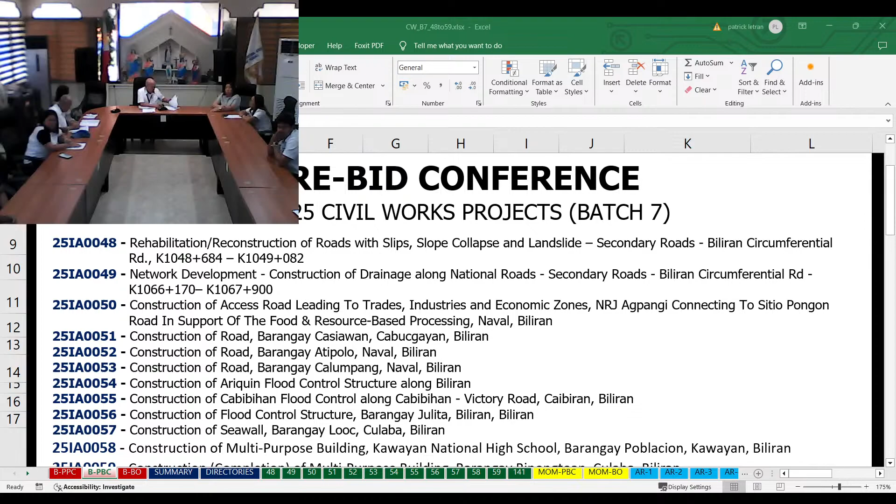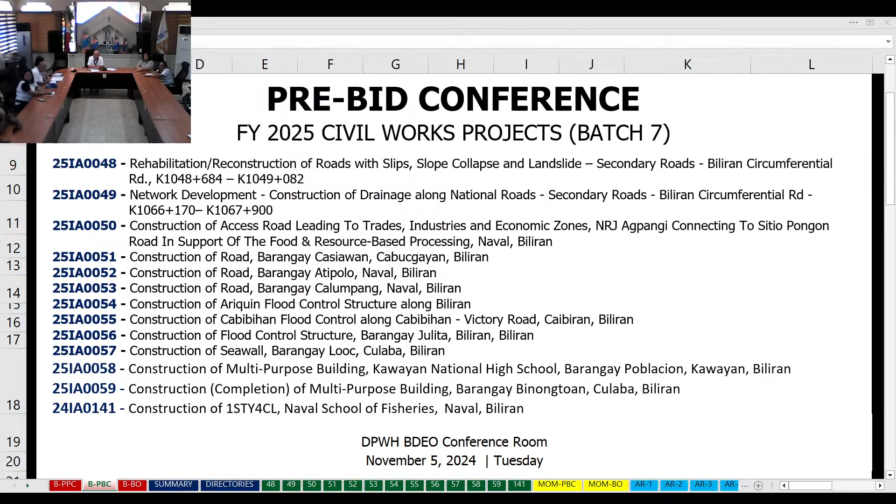This morning, we will be having the pre-bid conference for 13 projects for CY 2025. As Vice Chairperson of the Bids and Awards Committee of this office, I will preside over this pre-bid conference in behalf of our chairperson, who is now at the regional office for an emergency meeting called by the Assistant Regional Director.

The pre-bid conference, as per Section 22 of the IRR of RA 9184, shall be done for projects costing 1 million and up. For projects less than 1 million, the pre-bid conference may be conducted at the discretion of the Bids and Awards Committee. Since our projects cost more than 1 million, this pre-bid conference is mandatory.

The pre-bid conference shall discuss, clarify and explain, among other things, the eligibility requirements and the technical and financial components of the contract to be bid, including questions and clarifications to be raised by prospective bidders. But unfortunately, we don't have prospective bidders despite being notified properly.

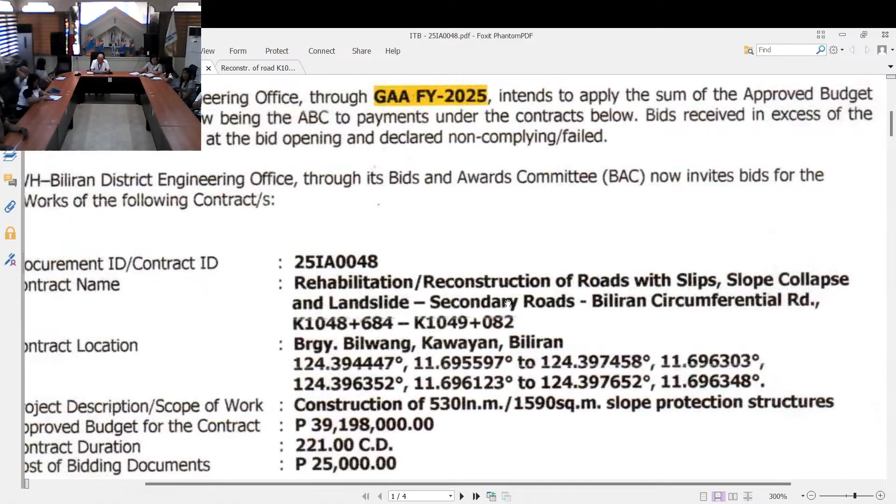Biliran Circumferential Road, kilometer 1048 plus 684 to kilometer 1049 plus 082, located in Barangay Bilwang, Kawayan, Biliran. So who will discuss this? Engineer Mintruda.

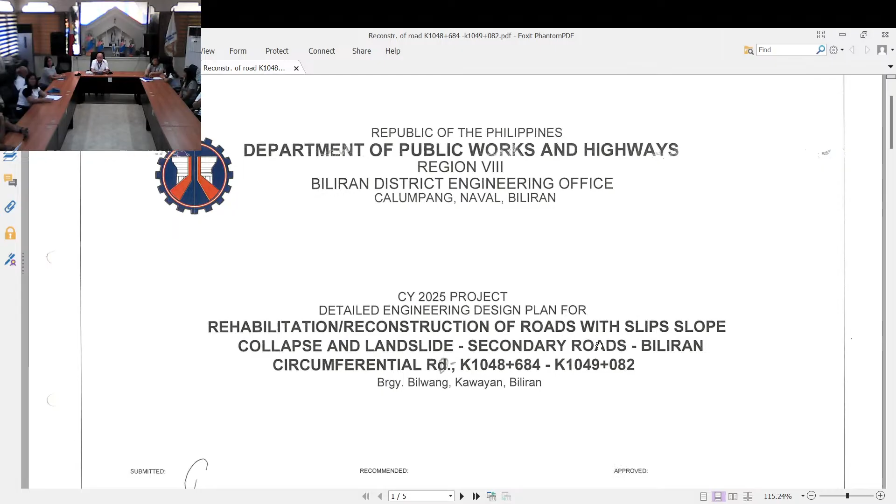Good morning, everyone. This project is construction of a retaining wall located at Barangay Bilwang, Kawayan, Biliran. The scope of work is construction of 530 linear meters or 1,590 square meters of slope protection structures. The project amount is 40 million, but the approved budget for the contract is 39,198,000 pesos. The total contract duration is 221 calendar days.

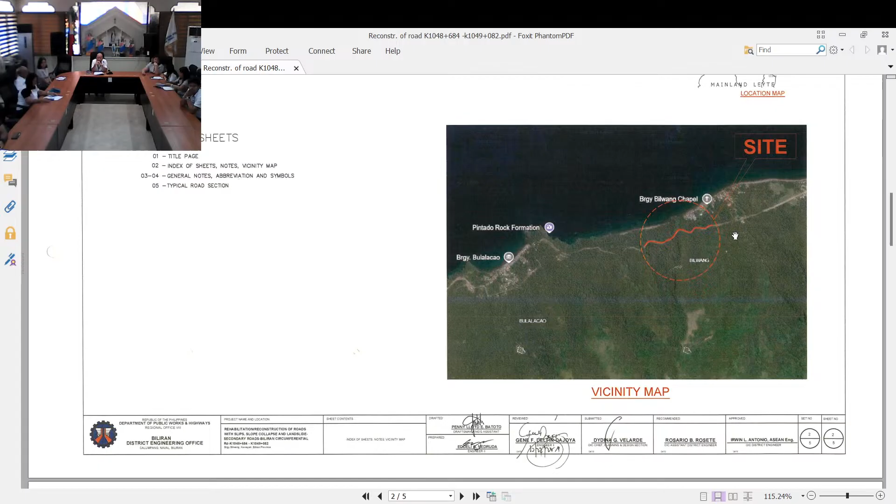This project has two locations: one at the cliff side and the other at the mountain side. At the cliff side, the design will be a reinforced concrete cantilever wall with the foundation supported by a steel sheet pile 6 meters in length. This cantilever wall has a height of 5 meters, as seen on the screen.

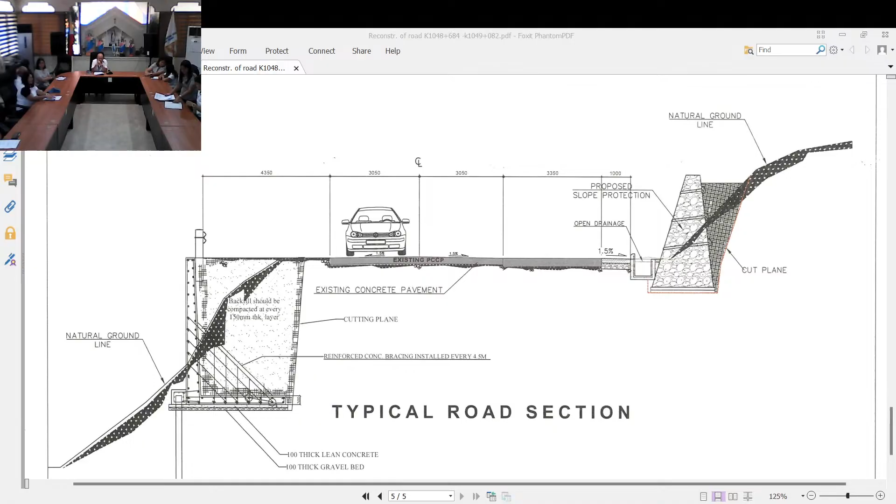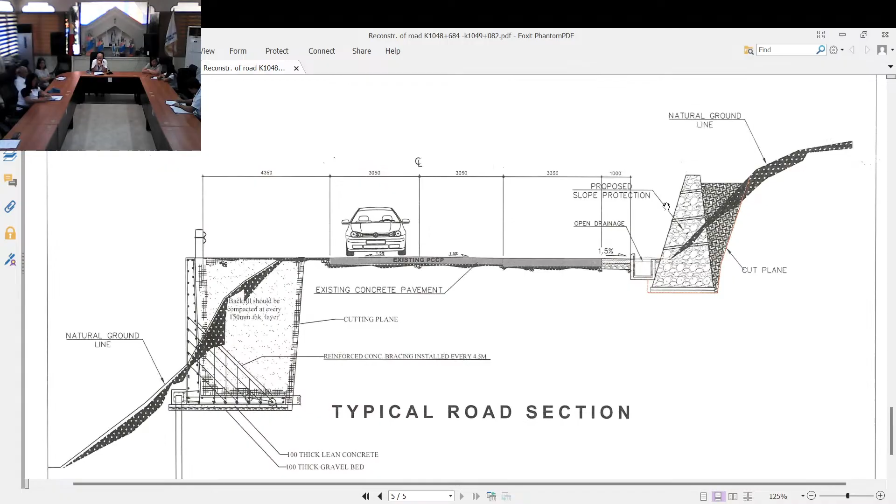Then on the right side, the design will be a rubble concrete retaining wall with a total height of 4 meters. It also includes construction of concrete drainage. So that is all for that project. Okay, thank you, Engineer Jack.

Next project is network development, construction of drainage along national roads, secondary roads, Biliran Circumferential Road at kilometer 1066 plus 170 to kilometer 1067 plus 900, located at Calumpang, Biliran.

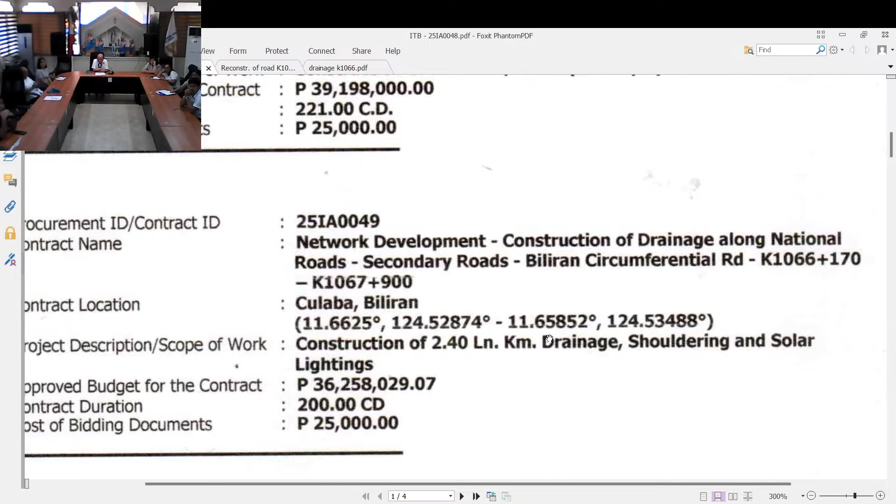Engineer Salunoy discusses: Good morning. Next project, contract ID 25IA0049, network development, construction of drainage along national roads, secondary roads, Biliran Circumferential Road at kilometer 1066 plus 170 to 1067 plus 900. Contract location, Culaba, Biliran. Project description: construction of 2.4 linear kilometers of drainage, including shouldering and solar lighting. The approved budget for the contract is 36,258,029 pesos and 7 centavos, with a contract duration of 200 calendar days.

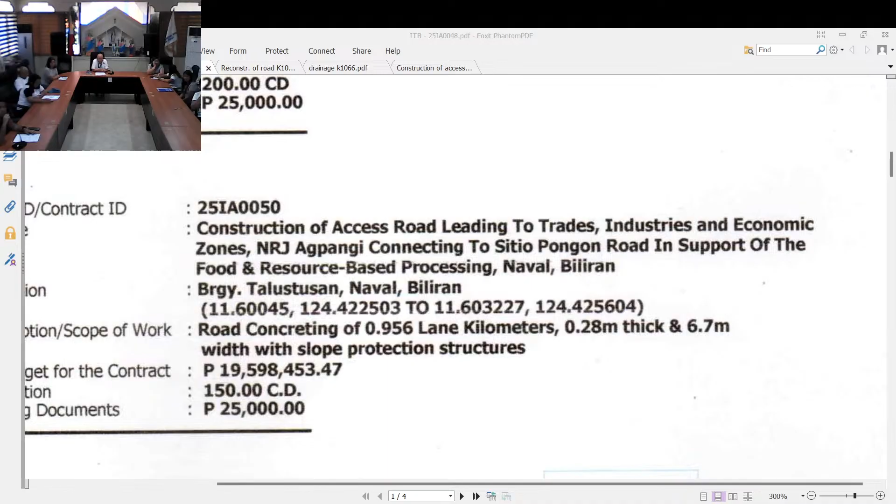Okay, you want to discuss this? Yeah, Porto, you want to come in?

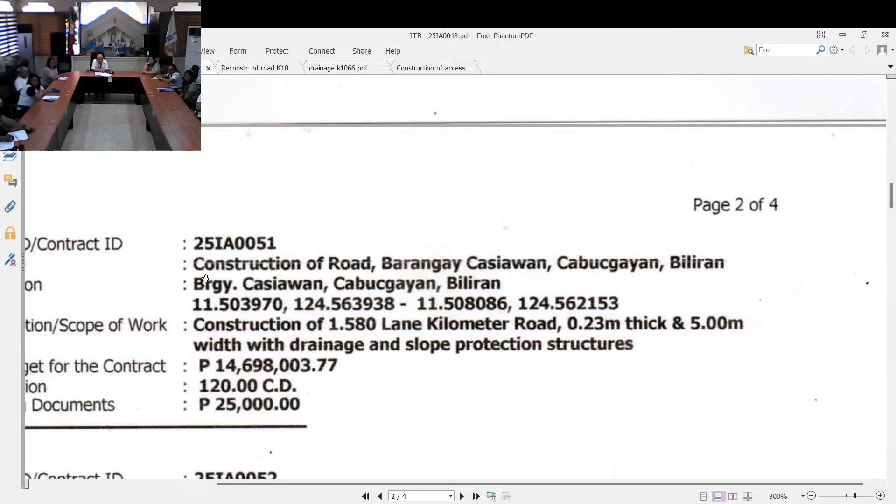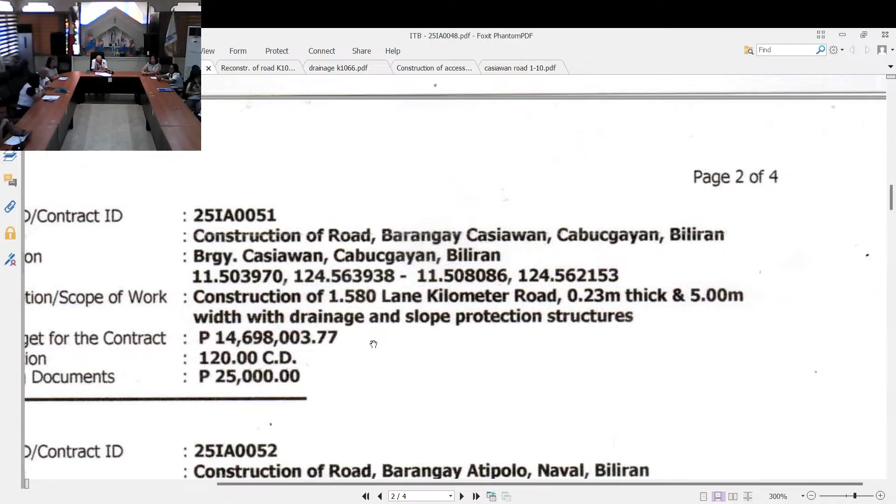So hello, for the next project: 25IA0051, construction of road Barangay Casiawan, Cabucgayan, Biliran. Scope of work is construction of 1.58 lane kilometers road, 0.23 meter thick, 5 meter width with drainage and slope protection structures, with an approved budget of the contract of 14,698,003 pesos and 77 centavos, contract duration of 120 calendar days.

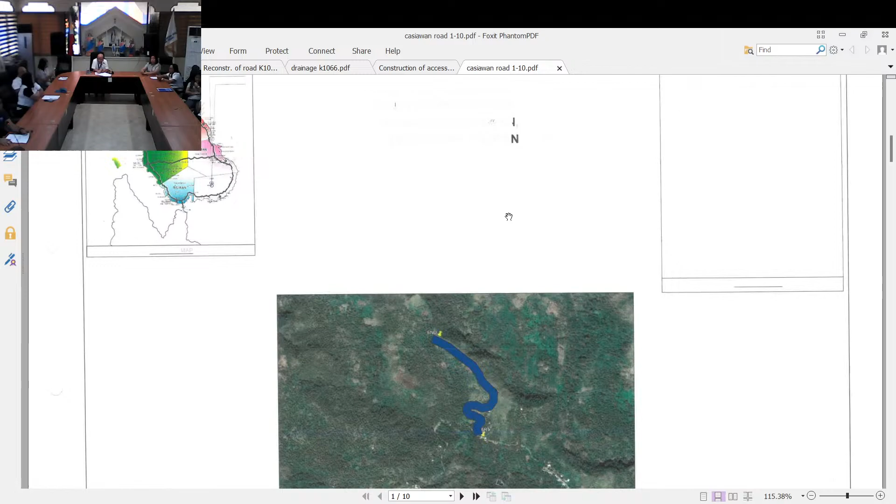Next project, construction of road, Barangay Atipolo, Naval, Biliran. Project ID 25IA0052. Project description: concreting of 1.114 lane kilometer, 0.23 meter thick, 5.0 meter width. Approved budget for the contract is 7,918,581 pesos and 96 centavos, contract duration of 85 calendar days.

That's all. Right side before the bridge. Oo.

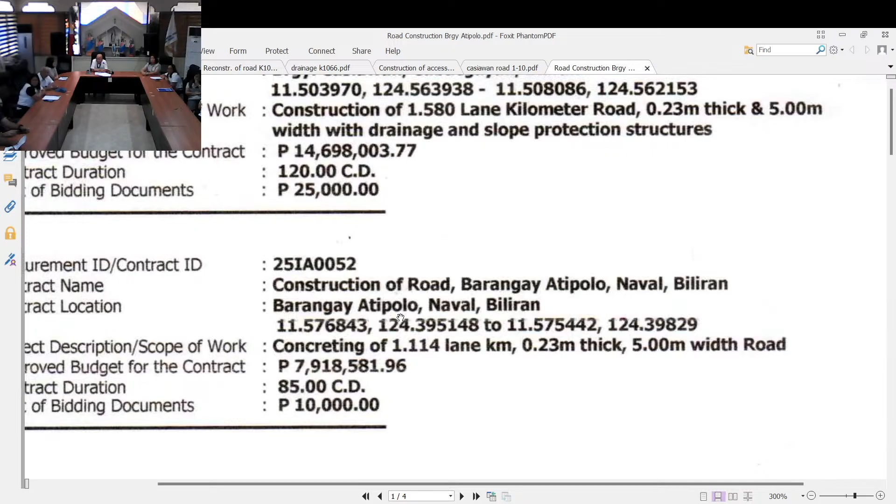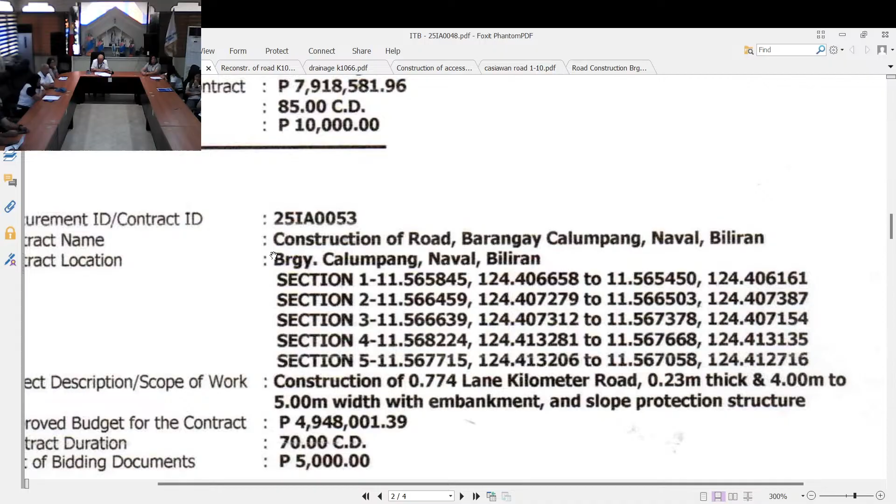Next project, construction of road, Barangay Calumpang, Naval, Biliran, with many sections, section 1 to 5. Contract ID 25IA0053, construction of road Barangay Calumpang, Naval, Biliran. Project location is Barangay Calumpang, Naval, Biliran, with 5 sections. Scope of work is construction of 0.774 lane kilometers, 0.23 meter thick, 4 to 5 meter width with embankment and slope protection structure, approved budget for the contract of 4,948,001 pesos and 39 centavos, contract duration of 70 calendar days.

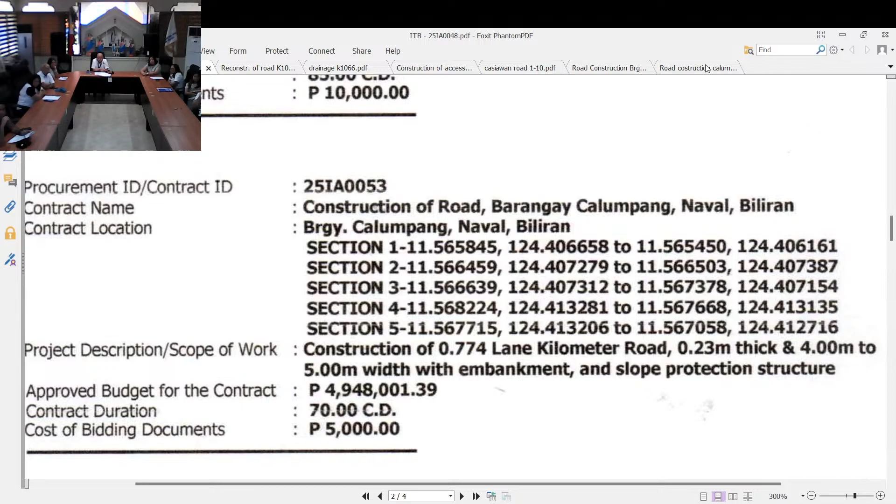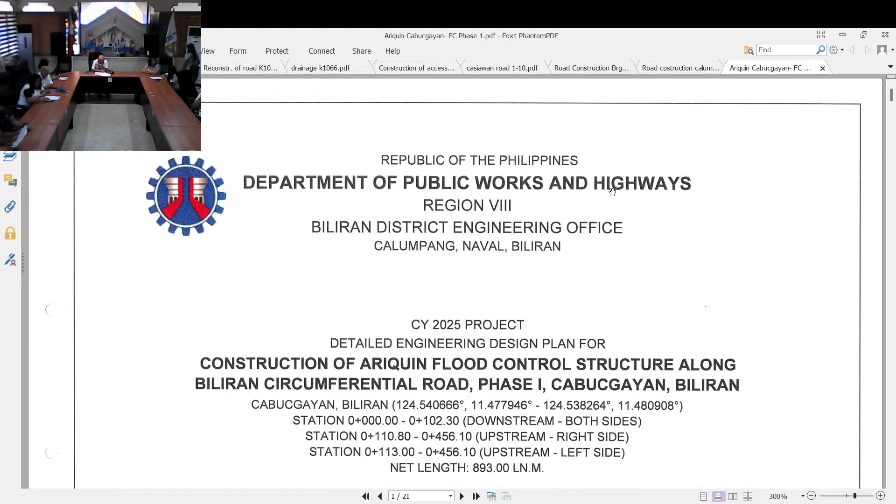Location is across the gas station, along the path. 893 linear meter flood control structure, with approved budget for the contract of 48,998,334 pesos and 40 centavos, contract duration 246 calendar days.

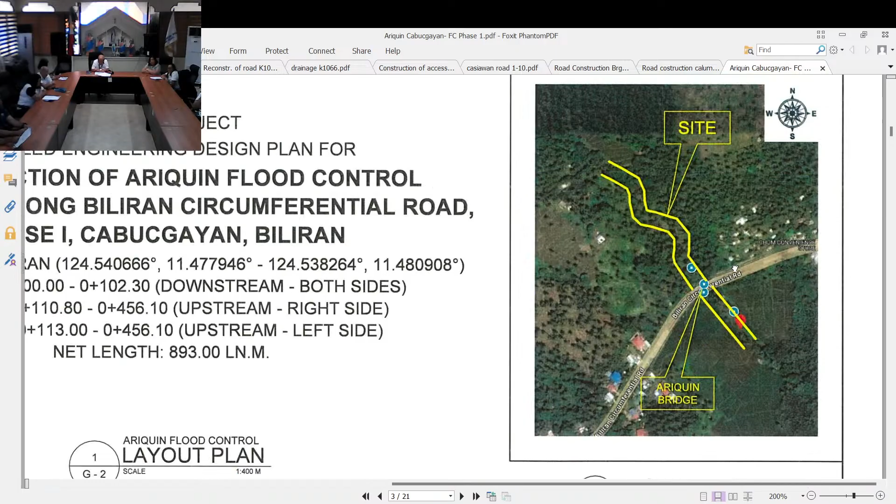Okay, location is downstream, Ariquin Bridge in Cabucgayan.

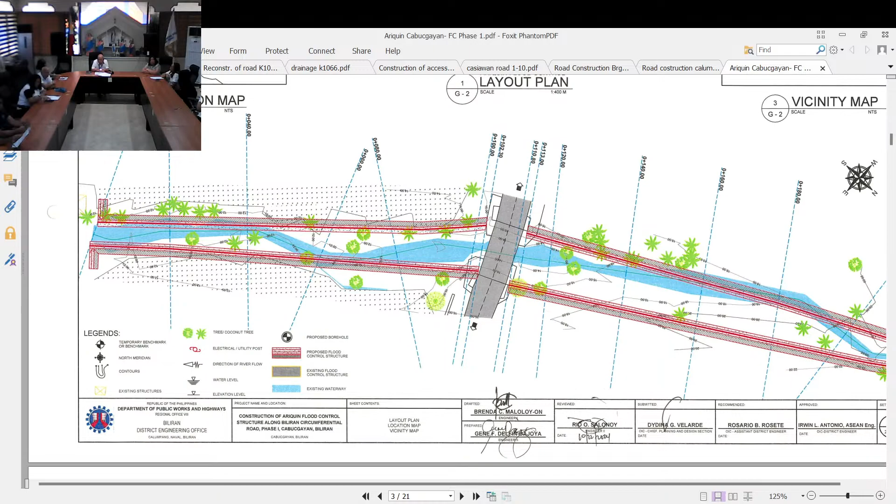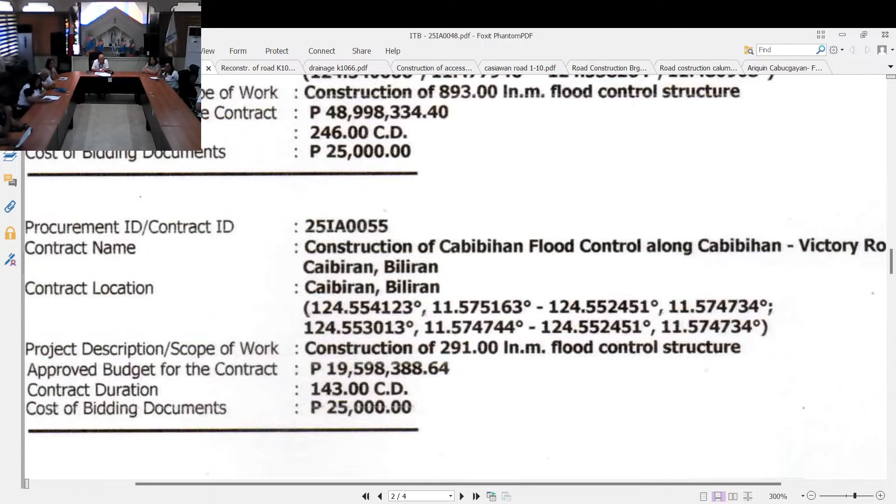Next project, construction of Cabibihan flood control. The first section is near Cabibihan Bridge.

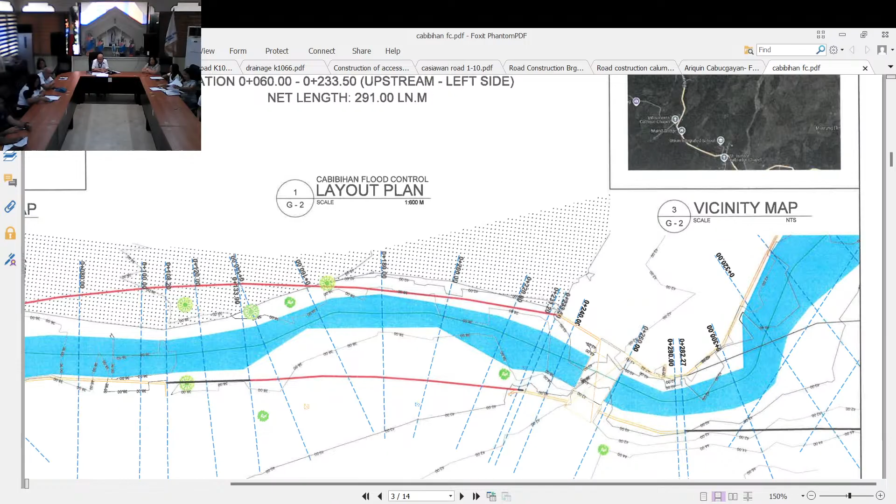Next, construction of flood control structure, Barangay Julita, Biliran. Project 25IA0056. Project description: construction of 234 linear meter flood control structure. Approved budget for the contract is...

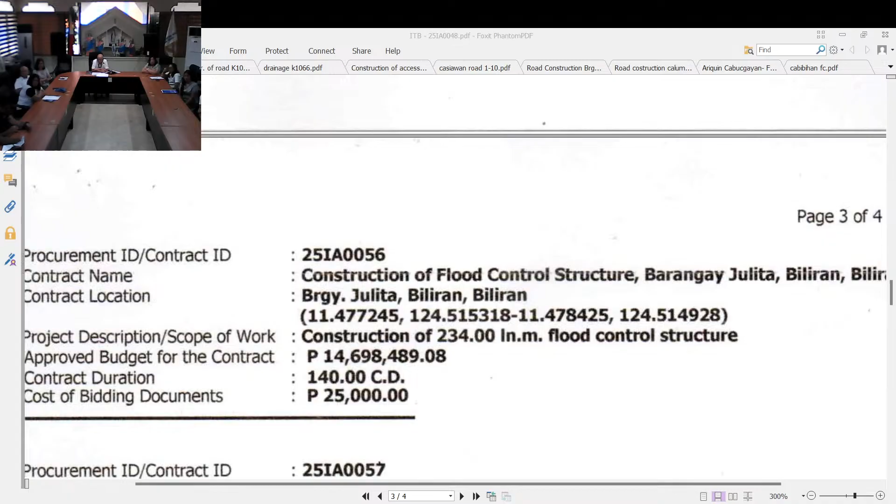Next project, 25IA0057, construction of seawall, Barangay Tulaba, Biliran. Project description: construction of 80 linear meter seawall structure with reinforced concrete facing. Approved budget for the contract is 4,948,246 pesos and 50 centavos, contract duration 90 calendar days.

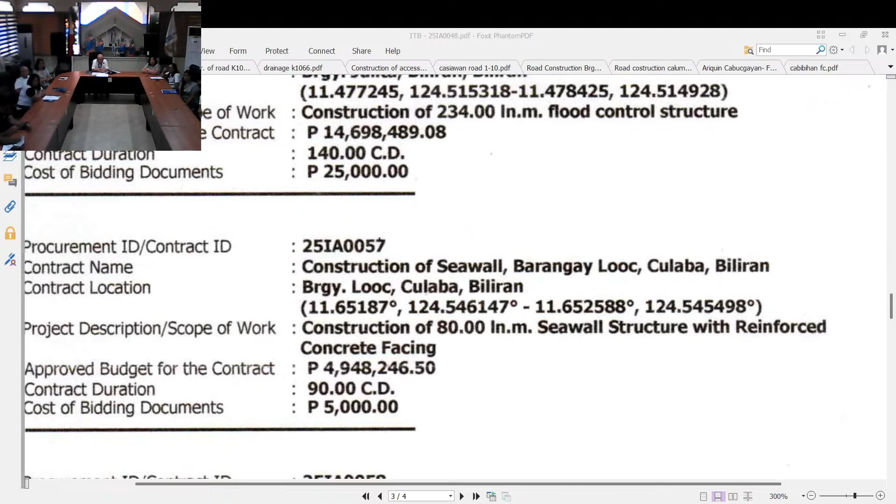Next, construction of multi-purpose building, Cabucgayan National High School, Barangay Cabucgayan, Biliran.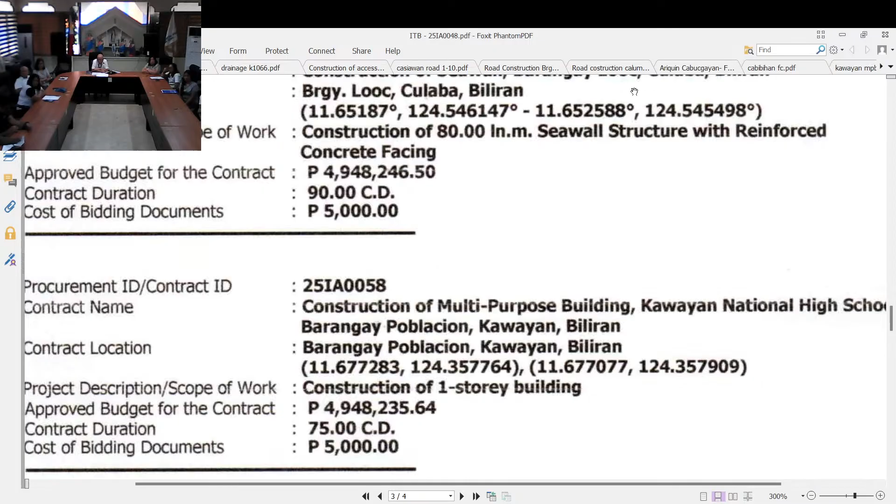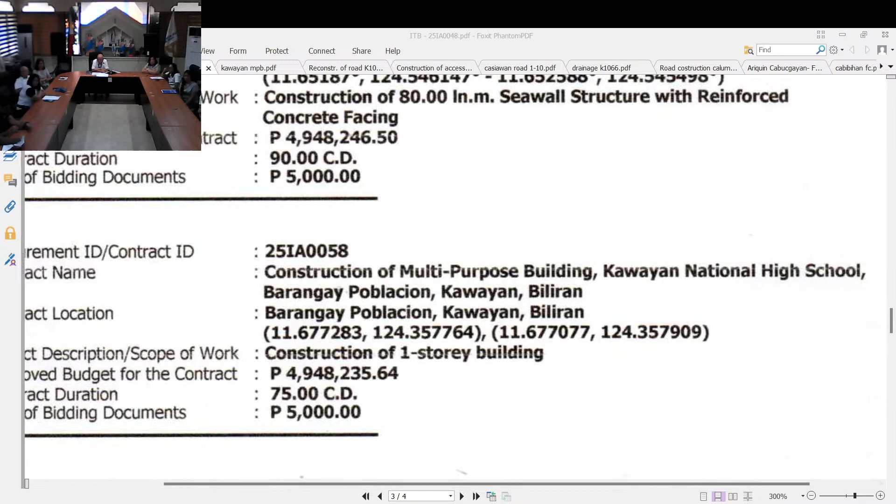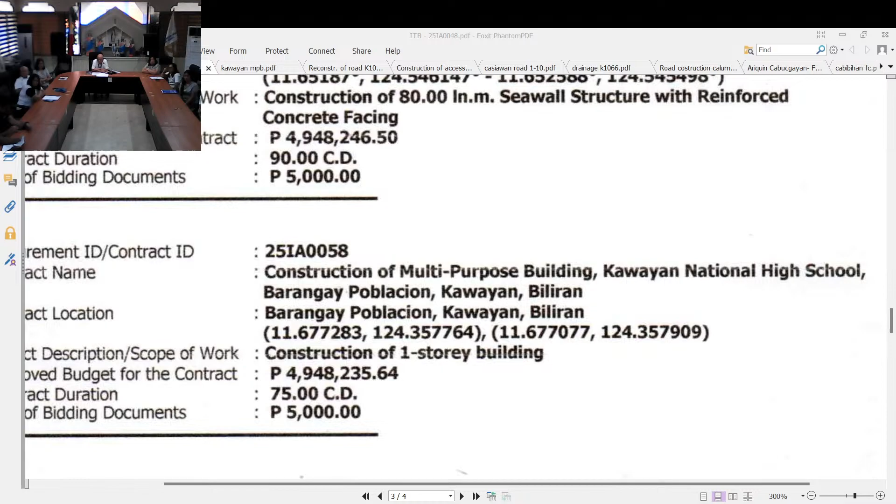Good morning, everyone. The contract ID for this project is 25IA0058, with the title Construction of Multi-Purpose Building, Kawayan National High School, Barangay Poblacion, Kawayan, Biliran. The scope of work for this project is roof trusses, roofing works, and concreting, with the ABC of 4,948,235 pesos and 64 centavos, with a contract duration of 75 calendar days.

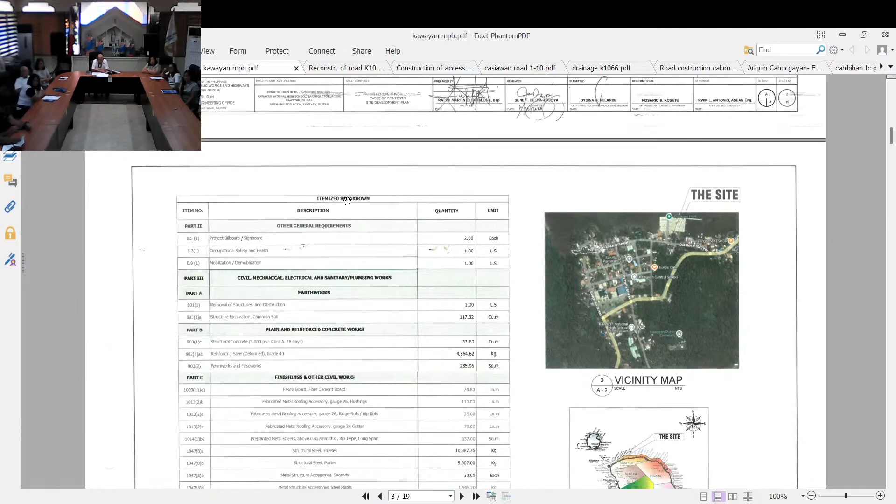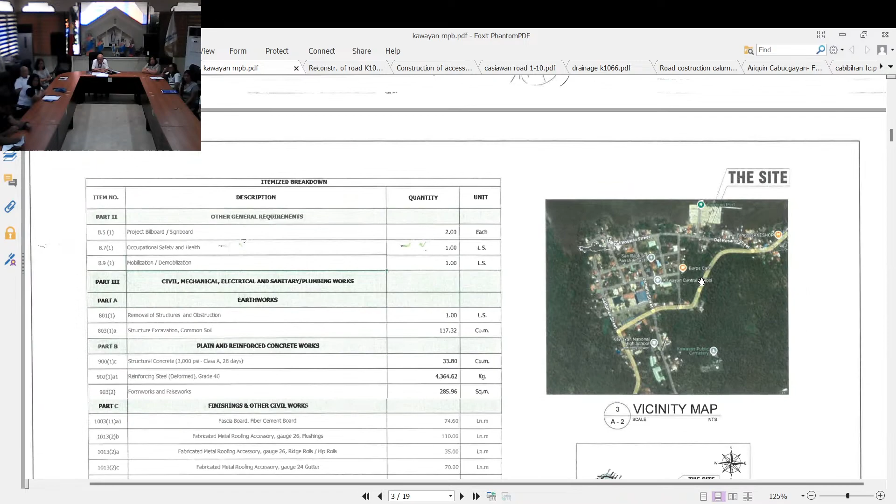So for this project, the scope is roofing works on an existing structure. It's not for completion, but for other scope items. Results.

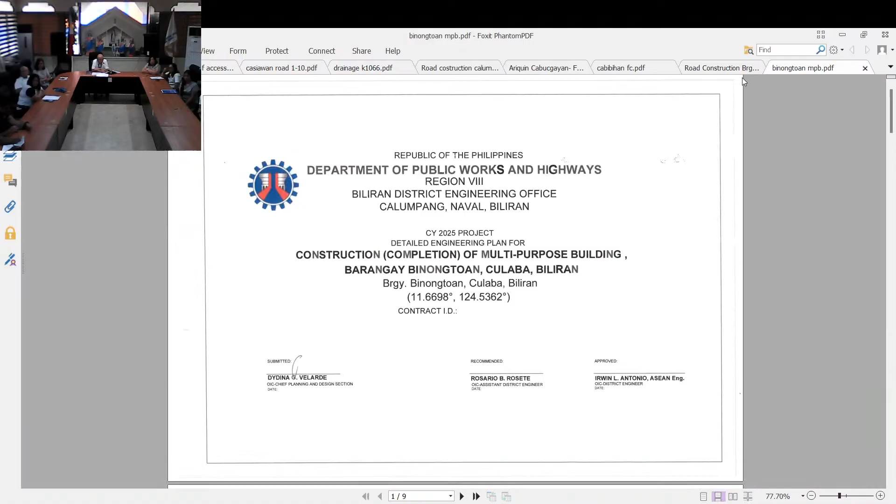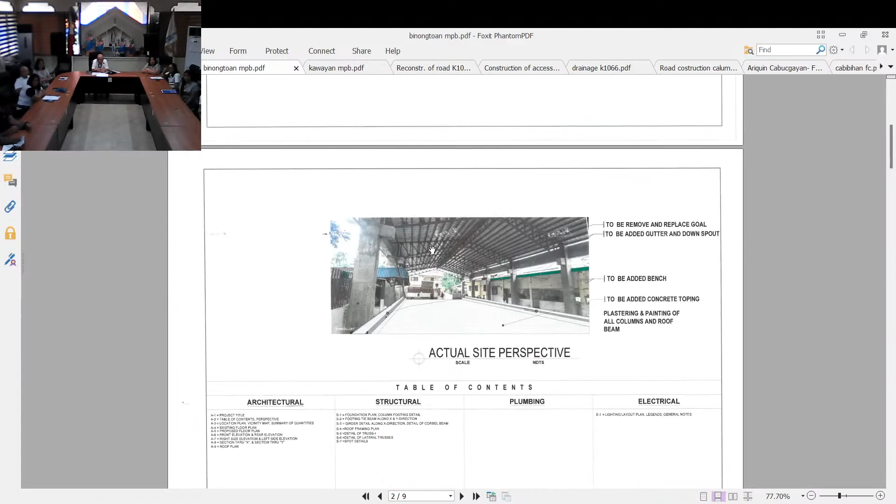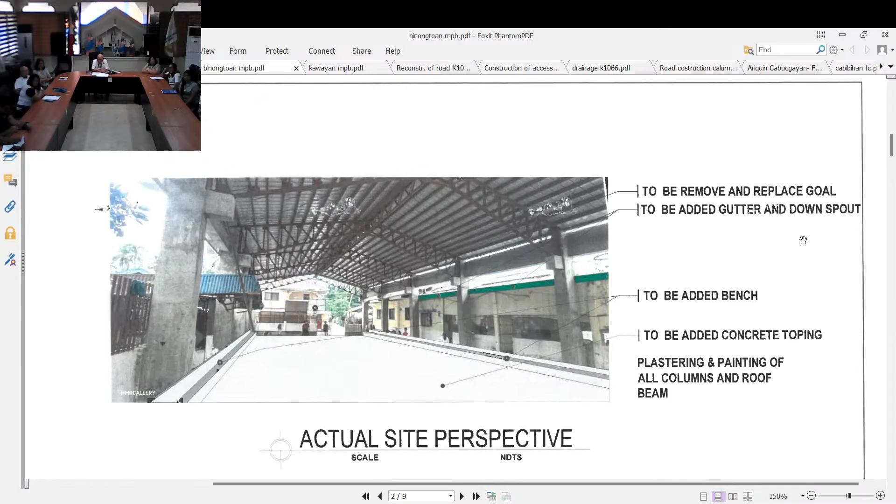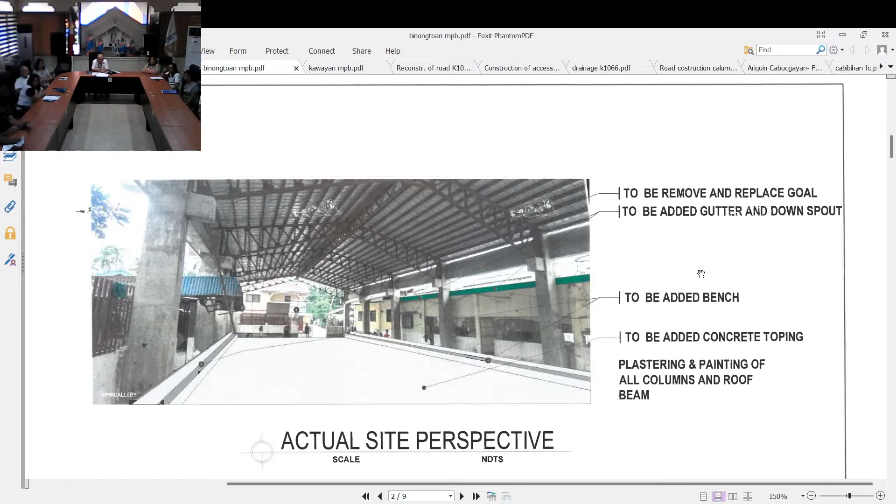And practical necessary scope items: bench, topping, replacement, and finishing scopes including plastering and painting works. That's all.

Next project, 24IA-0141, construction of one-story four classroom building, Naval School of Fisheries, Naval, Biliran.

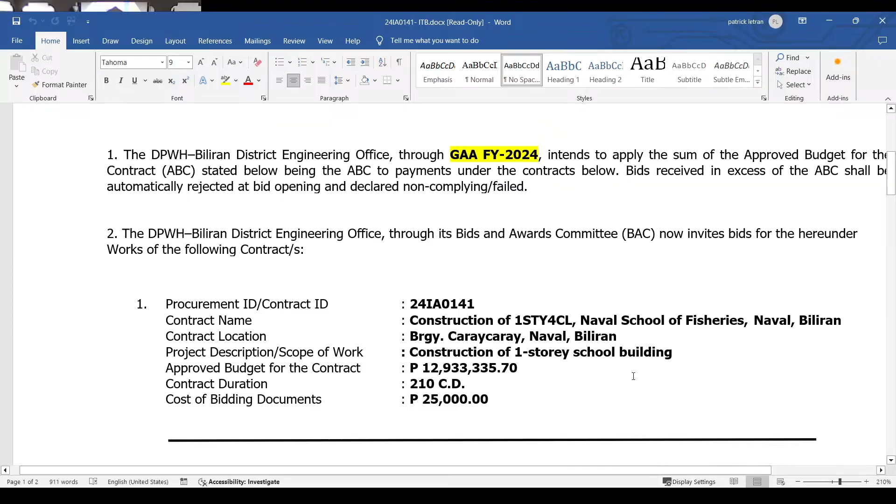Okay, for the next project, 24IA-0141, construction of one-story 4CL, Naval School of Fisheries, Naval, Biliran. Project description or the scope of works is construction of one-story school building, from foundation to roofing works, fully completed, with the approved budget for the contract of 12,933,335 pesos and 70 centavos, contract duration of 210 calendar days.

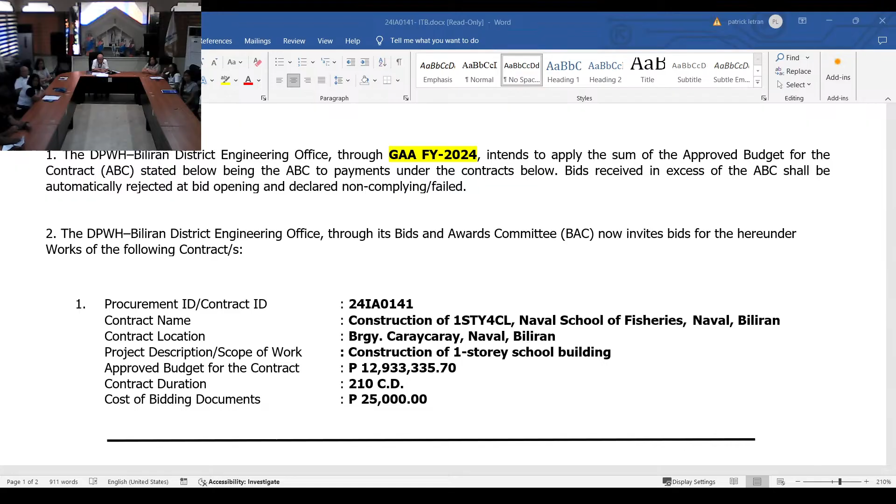Let's go. So, any more comments? None. None. You, anything? None. Requirements.

Includes instruction to bidders, general conditions of contracts, special conditions of contracts, specifications, drawings, bill of quantities, and forms.

Document applicable: bid security, authority of signing official, organizational chart for the contract, contractor's certification and key personnel, list of major equipment, omnibus sworn statement required in RA 9184, section 25.b. Then the financial proposal: bid form, bid prices, the bill of quantities, detailed estimates, and cash flow.

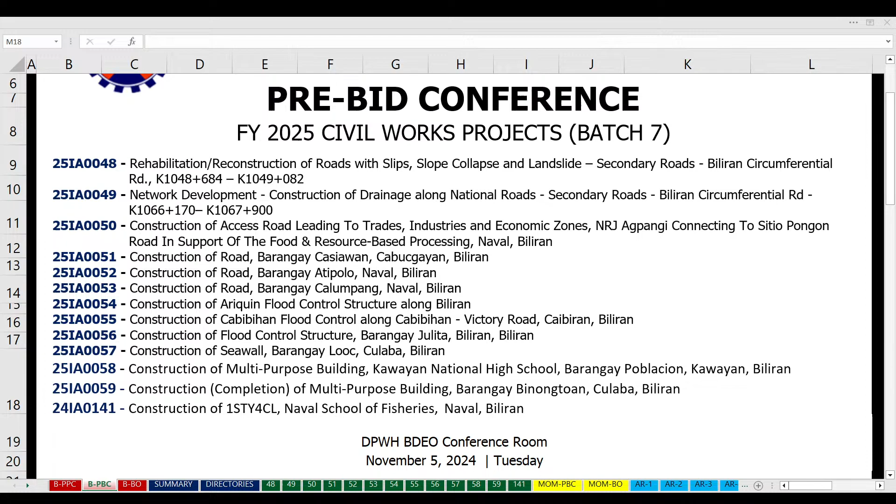Criteria and procedure for eligibility check, preliminary examination of bids, detailed evaluation of bids, post-qualification, and awards. So that's it. Since we have no more issues and concerns to be discussed, thank you.